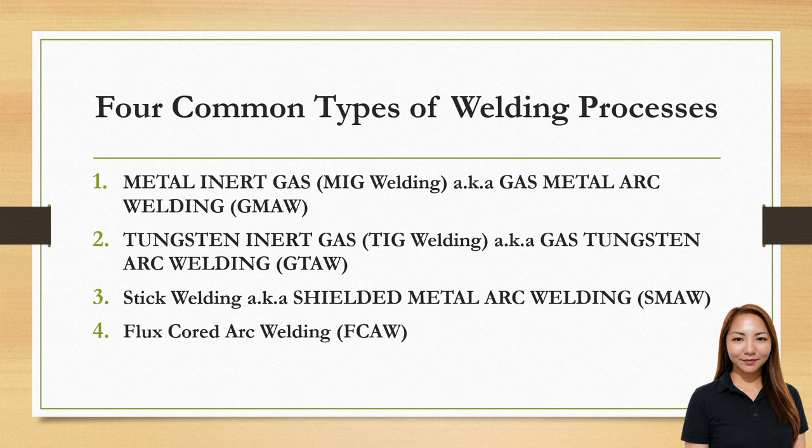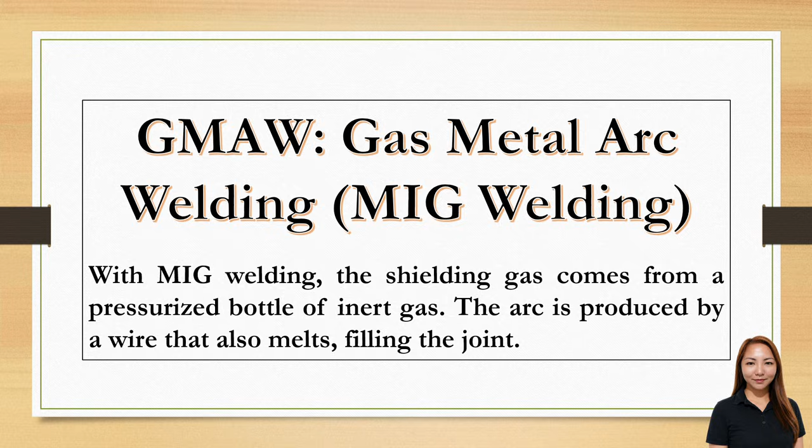Okay, so first, we have here the GMAW or gas metal arc welding. With MIG welding, the shielding gas comes from a pressurized bottle of inert gas. The arc is produced by a wire that also melts, filling the joint. Ayan, so ganito po yung illustration or itsura ng ating MIG welding.

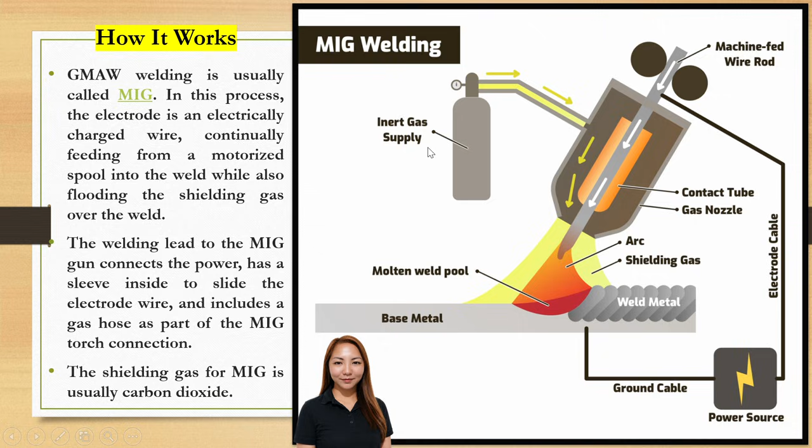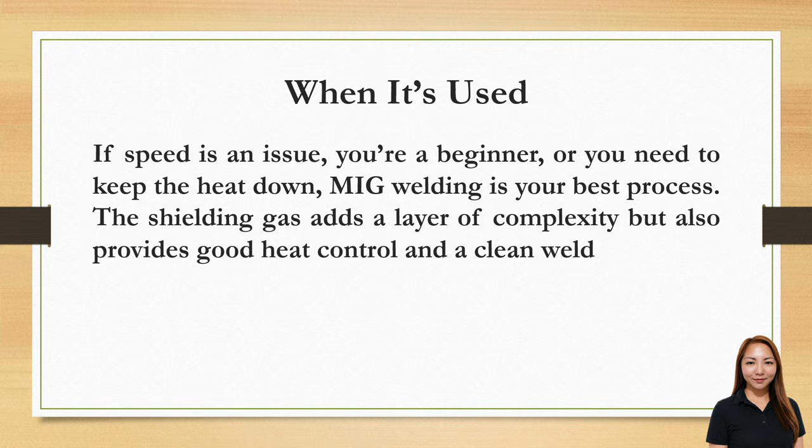If speed is an issue, you're a beginner or you need to keep the heat down, MIG welding is your best process. The shielding gas adds a layer of complexity but also provides good heat control and a clean weld. So, ano nga ba yung pros and cons nito? For the pros: good for production welding, continuous wire feed means easy to learn, good heat control, clean welds. For the cons, wind can blow away the shielding gas.

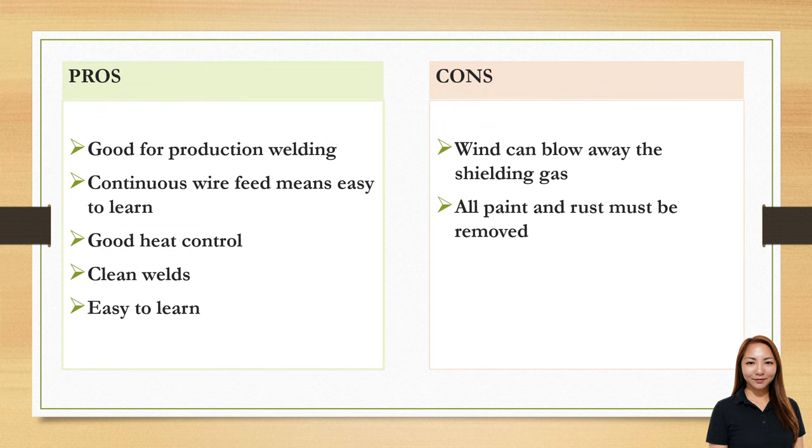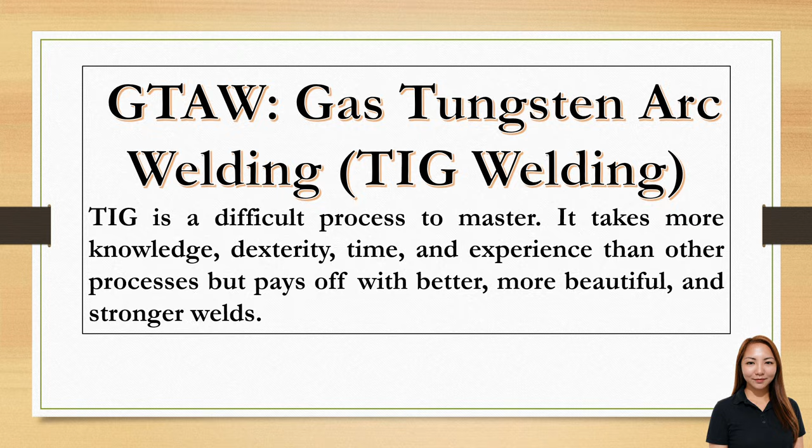So all paint and rust must be removed. Our next one is the GTAW or gas tungsten arc welding or TIG welding. Ito yung pinaka-difficult or pinaka-mahirap na process. It takes more knowledge, dexterity, time, and experience than other processes but pays off with better, beautiful, and strong welds.

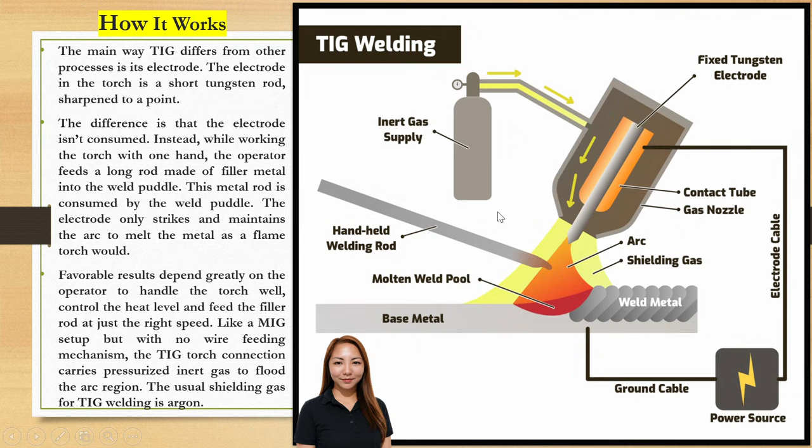TIG welding is used in places where strong and clean welds are needed. Some structures made by TIG welding are covered once built and can't be maintained easily. Aircraft frames, electric devices, high-end electronics, cabinetry, and race car roll cages are some examples. Another case for TIG is the opposite situation, where the weld is always visible and requires a certain level of eye appeal or high-tech validation. Exposed hot rod frames, custom bodywork, or designer lawn furniture are some instances.

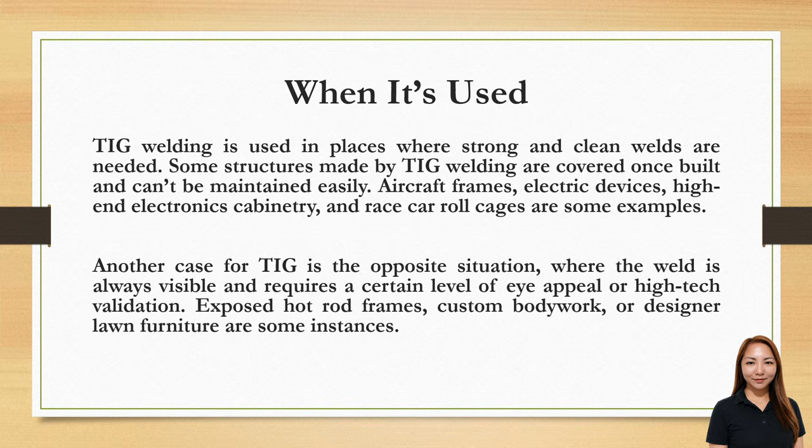So we also have here the pros and cons of TIG welding. For the pros, AC TIG, or alternating current TIG, welds aluminum and magnesium alloys. While direct current TIG welds brass, copper, steel, stainless steel, and titanium. Best quality, highest precision. Able to weld very thin materials and of course no slag.

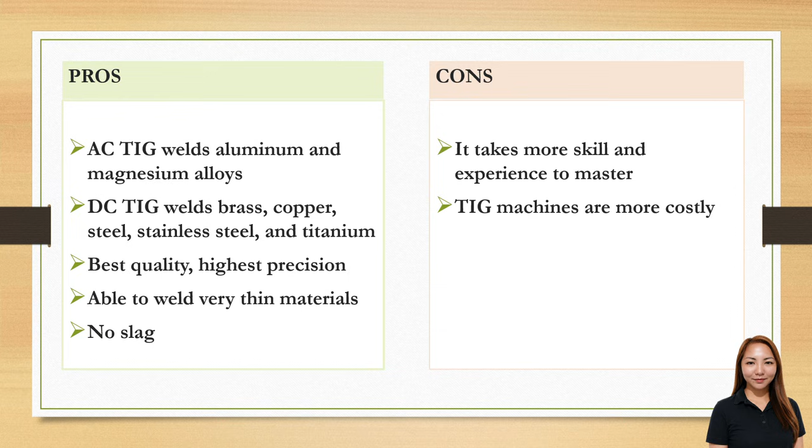So for the cons, it takes more skill and experience to master, and of course TIG machines are more costly. So mas mahal po yung mga welding machines na ginagamit when it comes to GTAW or TIG process.

So we have here the SMAW or the Shielded Metal Arc Welding. So ito yung ating main course or pag-aaralan, or ito yung i-actual natin sa ating training. Ang Shielded Metal Arc Welding. So stick welding came first and it's the simplest concept. People have been stick welding since the late 1800s. It has the oldest, simplest, and most proven technology. So hanggang ngayon pa rin po ay madalas dito sa Pilipinas na ginagamit po ang shielded metal arc welding.

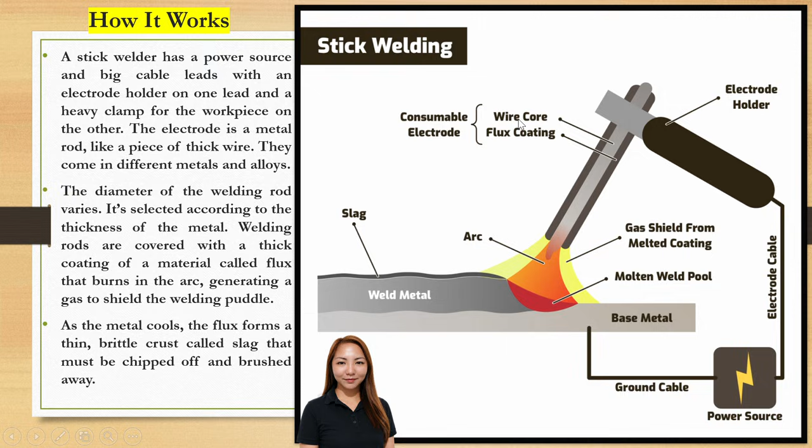So, when it's used, if it can be welded at all, it's welded by stick. Stick arc is preferred when it's hard to reach the weld or there's rust, oil, and other contaminants at the weld joint. It works well on steel, cast iron, aluminum, stainless, and hard surfacing on farm equipment. So, kahit po na pwede natin siyang i-welding sa steel, cast iron, aluminum and stainless, meron pong iba't ibang klase ng mga welding electrodes na dapat ginagamit natin kung iba't ibang klase po ng mga materials ang ating i-welding.

Okay, so ang pros is easy to learn. Again, sa lahat po ng mga welding processes, isa po ang shielded metal arc welding sa madaling pag-aralan. Pero kagaya nga po ng sinasabi natin, once na natuto kayo sa shielded metal arc welding, mas madali na kayong matututo sa GMAW and FCAW. Okay, so process easy to learn. Number 2 is affordable. Number 3 is not contaminant sensitive. Number 4 is you can weld almost any metal.

So the cons is thin metal can be hard to work. Generates a lot of heat and it takes a lot of time. Kasi it takes a lot of time kasi hindi po siya gumagamit ng continuous na wire feed, unlike po sa GMAW and FCAW natin, yung wire po nun ay tuloy-tuloy. Dito kasi sa shielded metal arc welding, kailangan natin magpalit ng mga electrodes.

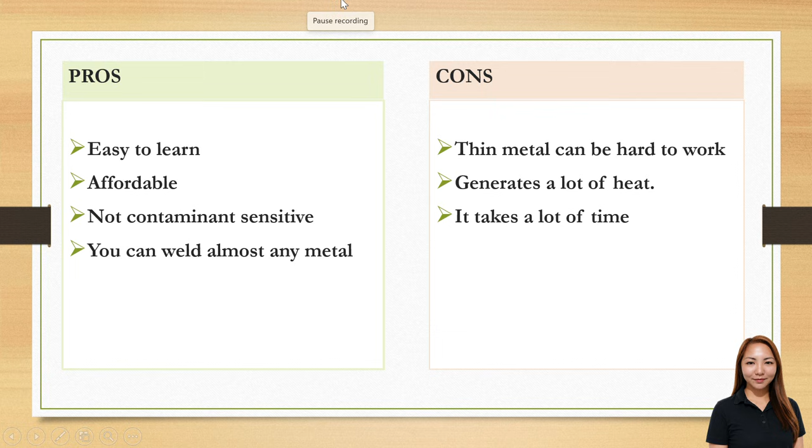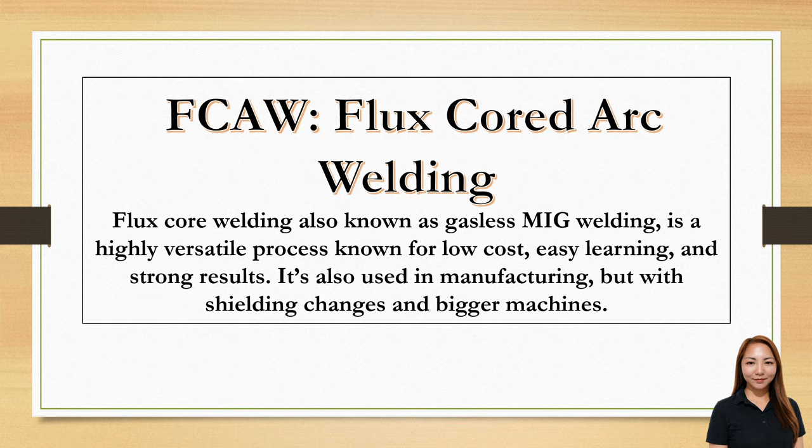So, next naman is ang ating FCAW or flux cored arc welding. So, flux core welding, also known as gasless MIG welding, is a highly versatile process known for low cost, easy learning, and strong results. It's also used in manufacturing but with shielding changes and bigger machines. So, ito yung illustration ng ating flux cored wire.

Okay, so we have two types of FCAW. We have here the FCAW-S and the FCAW-G. In FCAW-S, the S means self-shielded and it's the most common flux core technique because it's inexpensive, simple, and effective in a breeze. We also have the FCAW-G, also known as dual shielded wire welding. The G means that an external shielding gas is used in addition to the standard flux core wire. This approach provides a smoother, more controllable arc than FCAW-S.

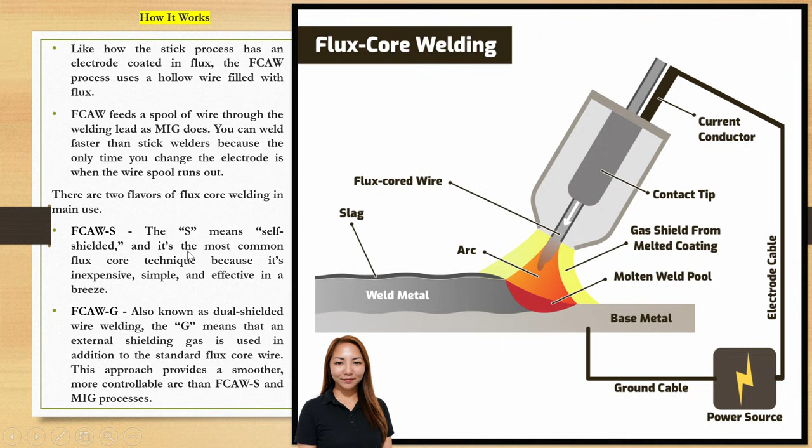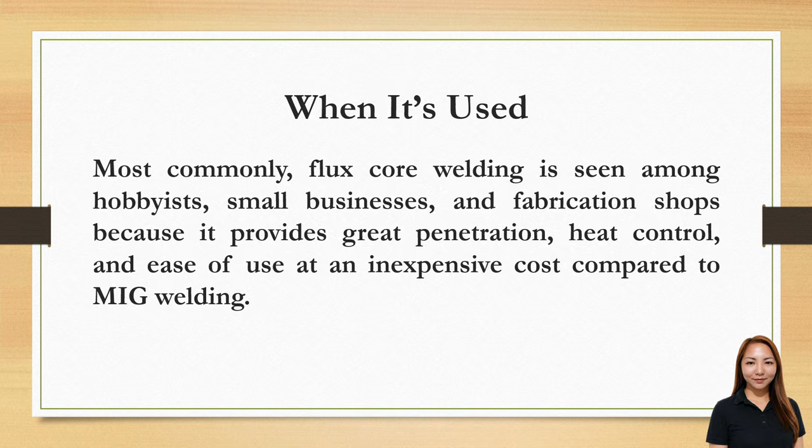Okay? So, when it's used, most commonly, flux core welding is seen among hobbyists, small businesses, and fabrication shops because it provides great penetration, heat control and ease of use at an inexpensive cost. So we have the pros: probably the easiest process to learn. Works well on dirt, paint, and rusty material. Can be used in windy conditions and can handle thick steel.

So we have the cons. Slag needs to be removed. Produces a lot of spatter. Okay, so marami siyang spatter. Okay, so yun lang yung mga differences ng ating four common or four main types of welding processes.